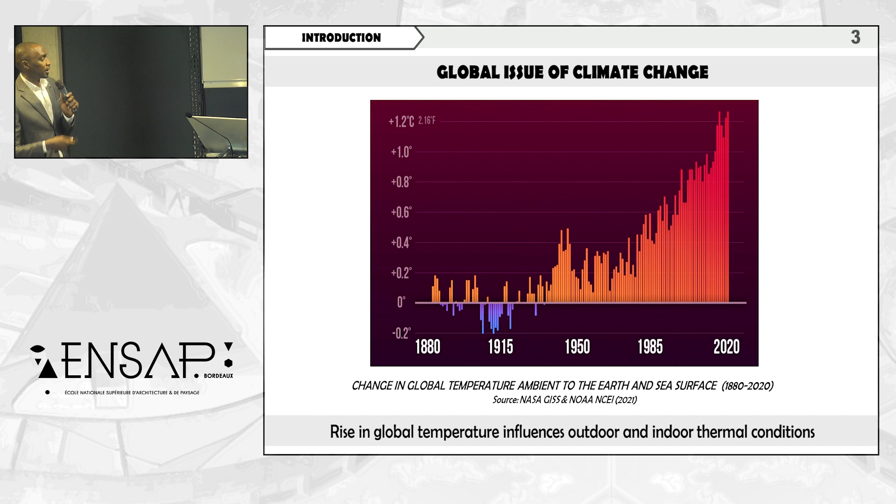However, this global warming has caused an increase in temperatures in the outdoor conditions, and these outdoor conditions have also led to an increase in the indoor thermal conditions. However, it is occupants that occupy these indoor places, and therefore these occupants are experiencing some kind of change in the thermal conditions in their indoor spaces. And these occupants are actually developing resilience, a way to adjust themselves or to adjust some other things to be able to live more comfortably in their indoor environment.

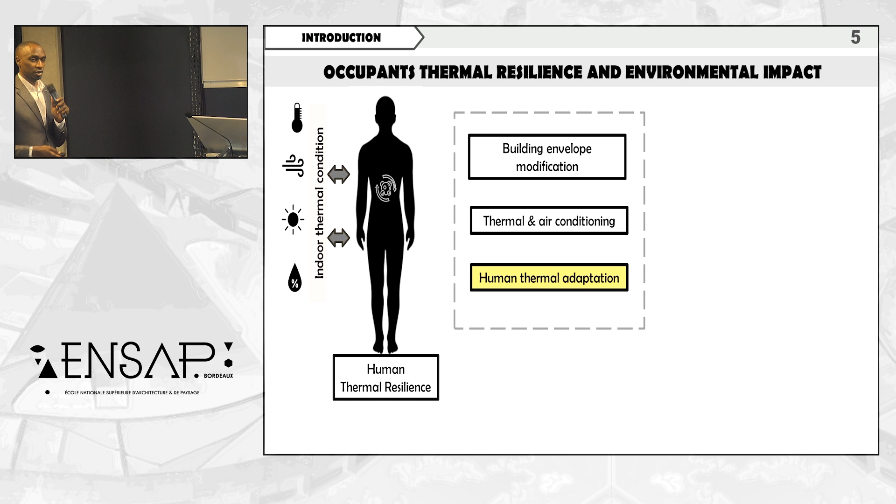Now, there are a few methods which occupants have used to develop their resilience, and this method could be mitigation method, or it could be adaptive method. Now, some of the mitigation methods are retrofitting building envelopes, modifying the building envelope to adjust the thermal condition within the space. Also, we have the air conditioning systems as some of the mitigation methods, and then we have the thermal adaptation of the occupant, of the individual within the buildings.

Now, this could result in the level of energy that is being consumed. It can also result in the cost of occupancy, the cost of energy. It also affects the environment, and it also has implications on the health and the well-being of the occupant. However, based on my research objective, I'll be focusing more on the human thermal adaptation.

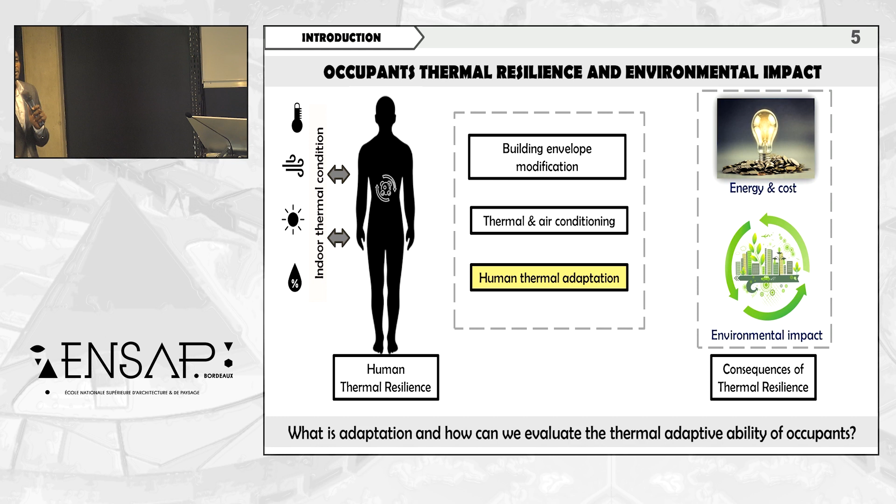Now, to talk about the human thermal adaptation, it is quite important for me to also make some emphasis on thermal comfort, because thermal comfort is a condition of the mind that is satisfied with the thermal environment. And according to ASHRAE, it is assessed subjectively. There are other definitions of thermal comfort, and some of the definitions show that thermal comfort is like an intersection of physical stimuli and cognitive systems of the human body.

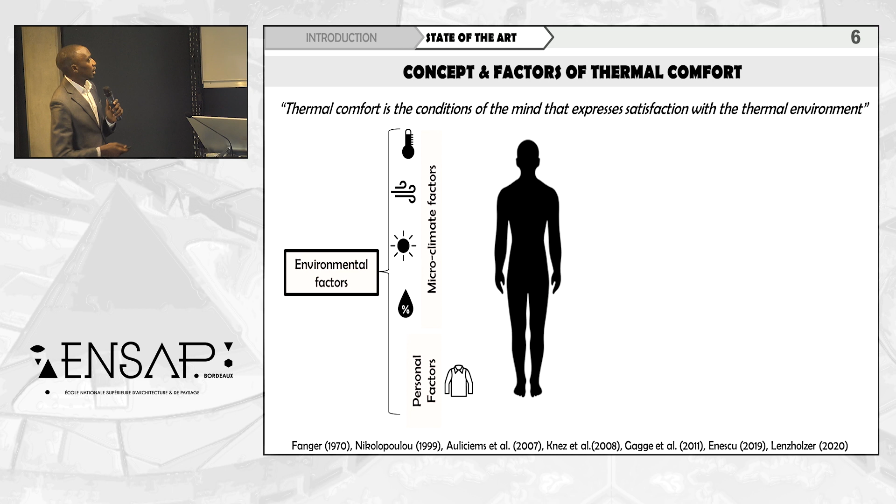However, there are various factors that affect this thermal comfort, and they can be grouped into the environmental factors, which include the microclimate factors, such as the air temperature, the humidity, the air velocity, the radiant temperatures, and the clothing. And then the other factor is the physiological factors, which have to do with the human thermoregulatory system. And this system has a lot to do with convection between the body and the environment, the radiation, the sweating, diffusion from the skin surfaces, and respiratory systems of the body.

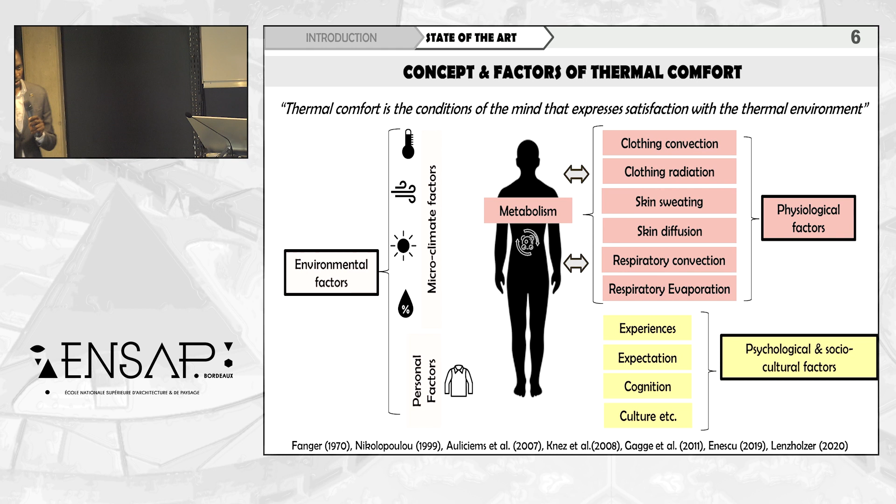We also have the psychological factors, such as the experiences the occupant has, the expectations they have, the cognitions, the habituations, their perceived control, and much more. And then we have sociocultural factors, which involve cultures. It involves also the technological advancement, the standard of living, the religion in a particular place. All this affects thermal comfort.

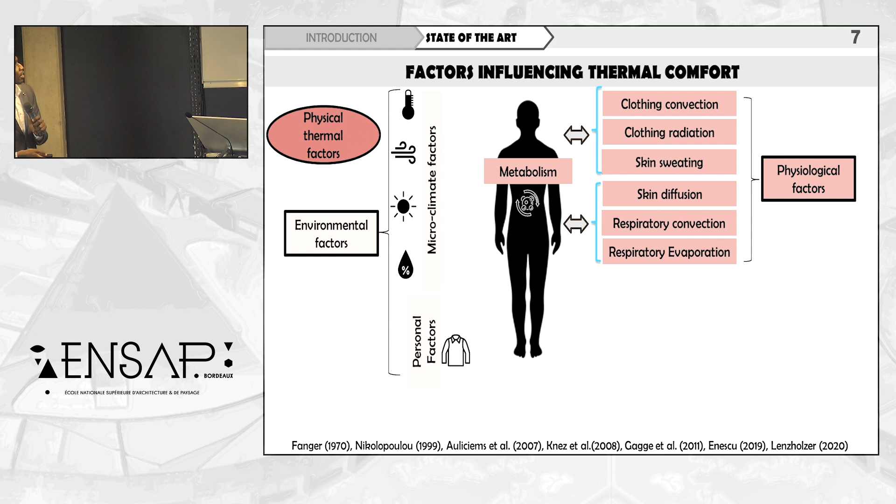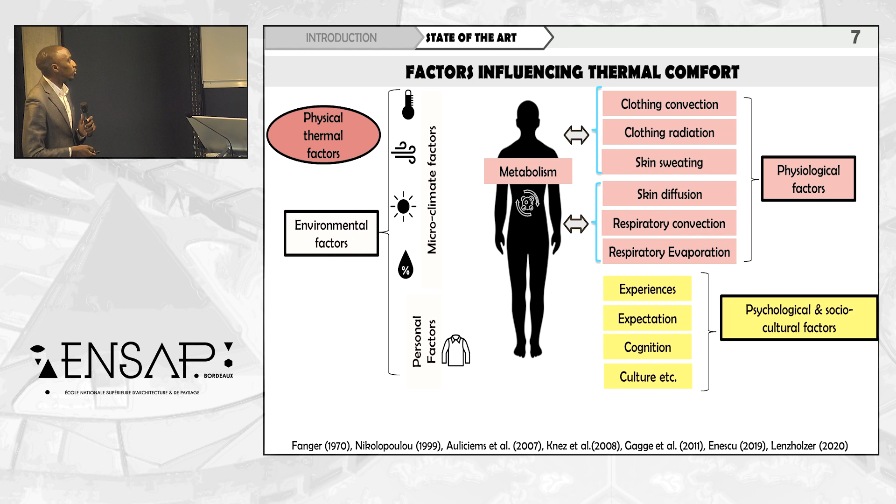However, we can group these factors into two main branches. Now we can group the environmental factors and the physiological factors as physical thermal factors, of course, because they are objective in nature and they cannot be influenced by human opinion. Also, we can group the second part into adaptive factors, which involve the psychological factors and the sociocultural factors.

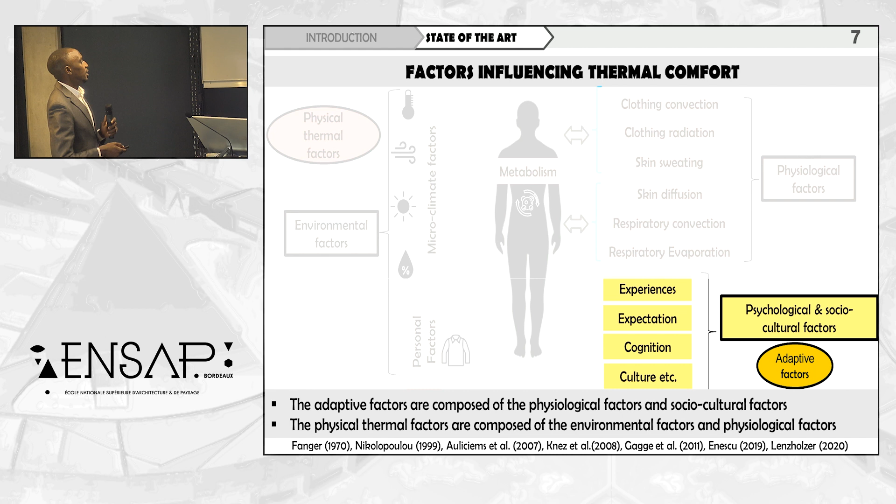Therefore, thermal perception of a person or of an occupant is influenced by the physical and adaptive factors. In other words, physical thermal evaluation and adaptive factors react together or combine in such a way to give us the final human perception. Now, I would also like to take you through the color codes I use in my presentation. As you can see, the red colors mostly refer to the physical thermal evaluations or factors. The yellow colors refer to most of the adaptive factors and evaluations.

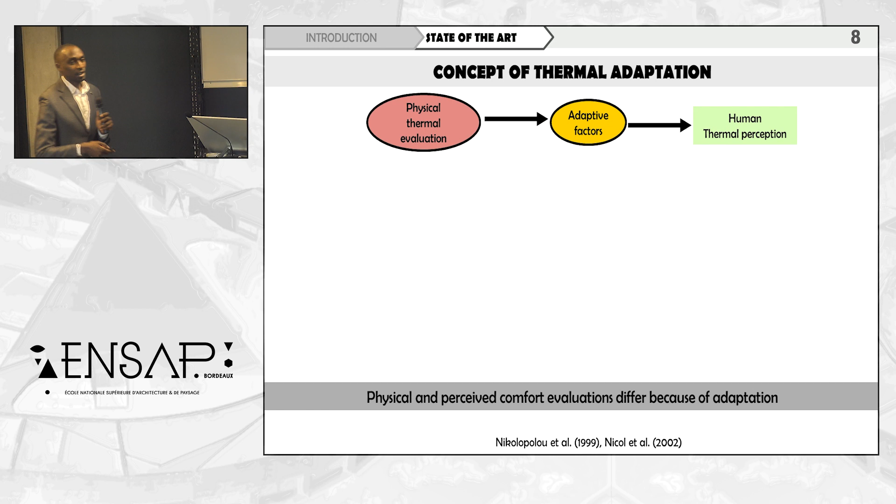And then the green color refers to most of the thermal perceptions and evaluations of perceptions. Now, I would love to define adaptation. Adaptation is a reduction or the diminution in the response of an occupant in order to tend towards thermal comfort, in order to feel more comfortable.

Now, to go forward, we can see that three factors are responsible: the physical thermal evaluation, the adaptive factors, and the human thermal perception. First of all, we want to see what other work has been done on the physical thermal evaluation. Now, the physical thermal evaluation is based on the heat balance principles. And the heat balance principle is based on the fact that the heat produced must be equal to the heat loss.

So therefore, the heat produced by the body metabolism should be equal to the heat loss by the body through convection, through radiation from the surface of the skin, through skin sweating, through diffusion from the skin surface, through respiratory convection, and through respiratory evaporation. Now, a balance between these creates thermal comfort. However, if there's a difference between them, then there's some level of discomfort based on the physiological realm or physiological evaluation.

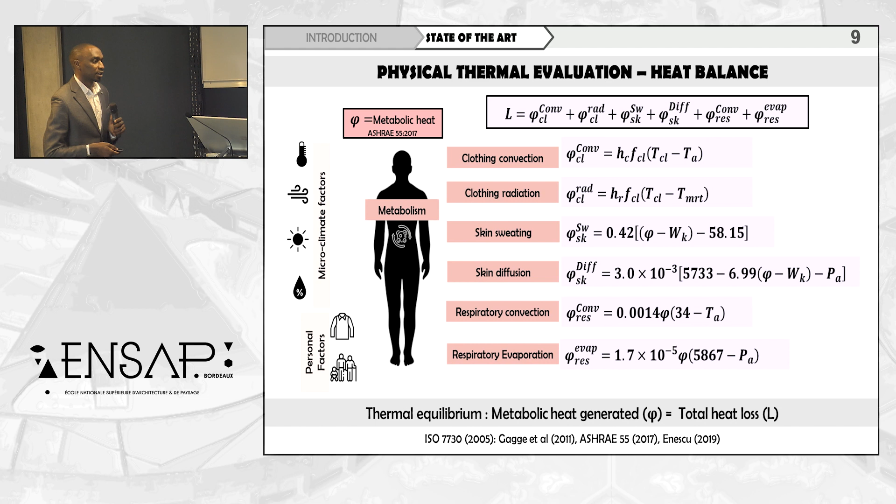Now, a researcher called Fanger was able to process this heat balance model or heat balance principle into thermal sensation votes. And these thermal sensation votes range from -3 to +3, showing the level of sensation of the subjects or of the occupant. Now, he performed some experiments in the Technical University of Denmark, where he placed some subjects in the climate chambers, and then he modified the thermal conditions within there, and then he took their thermal sensation vote.

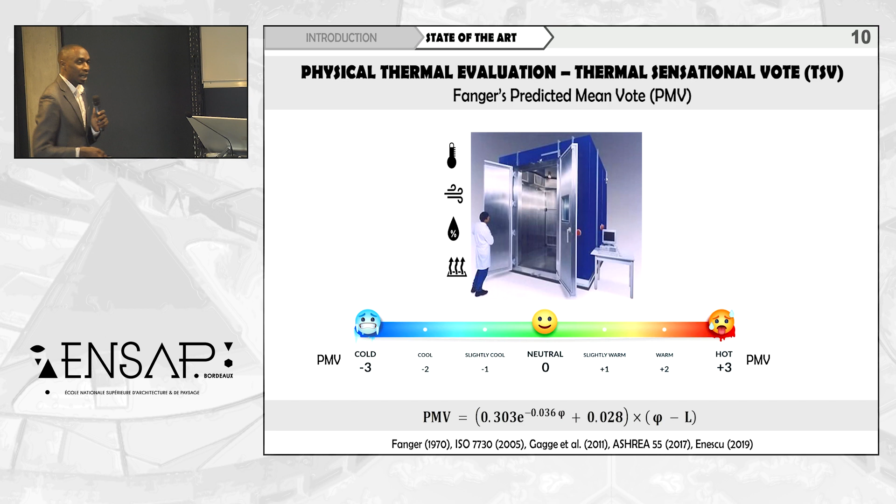He observed that this sensation vote has a relation with the heat loss from the subject's body. And therefore, he created a model called PMV, that's the predicted mean vote, which is a function of the difference between the heat produced and the heat loss from the body. This was a very good start or a very good model. However, there were a few limitations to this model.

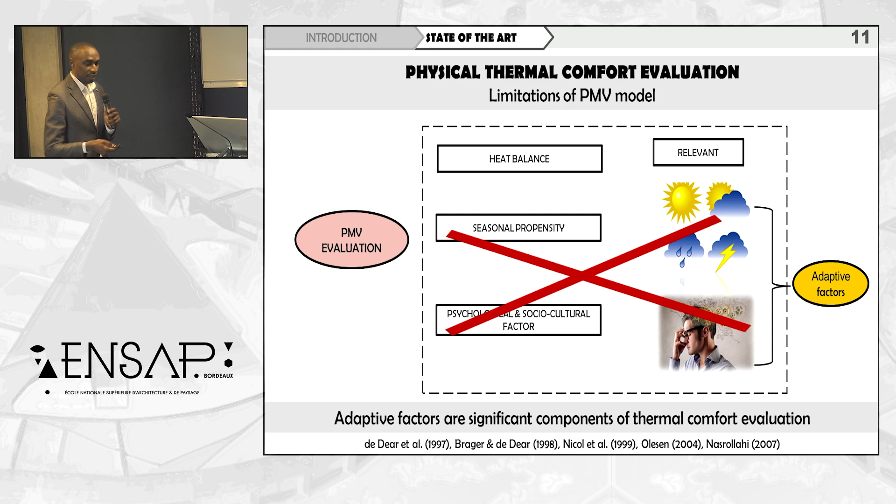Now, of course, this model functioned well with the heat balance. He tried to relate the heat balance to thermal sensation votes. However, this model didn't consider seasonal propensity, changes from like summer to winter. Of course, there are times when you have the same thermal condition or the same temperature in different seasons, and then you feel differently. Now, this model also didn't consider a lot of psychological factors, like we mentioned before, like experience, like habituation.

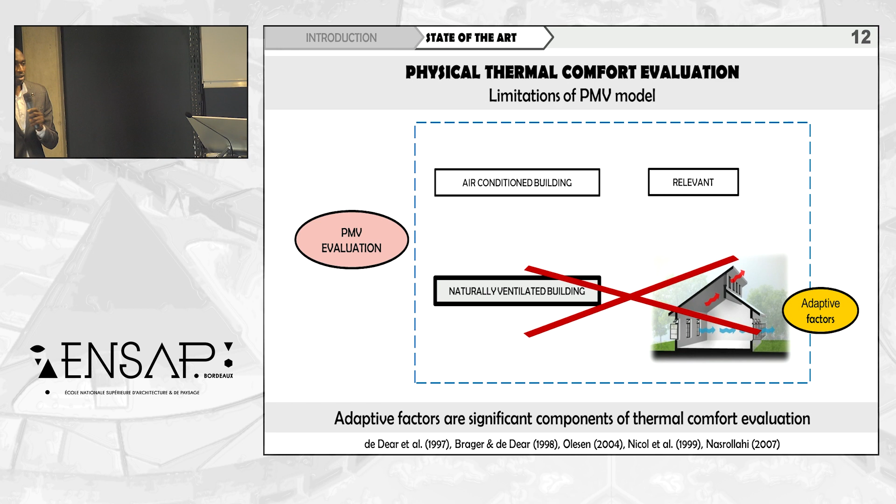Also, this model was relevant for air-conditioned buildings because the climate chambers were air conditioned, but there was some discrepancy found by field researchers, who explained that it overestimated the hot temperature and underestimated the cold thermal conditions. And these factors that were not taken into cognizance were actually the adaptive factors. However, to improve on these models, some field researchers proposed that there should be an adaptive model.

One of these researchers is Yao. And Yao proposed a model called the adaptive predicted mean vote. Now, Yao conducted some experiments in Chongqing University in China, where students were the subjects, in the classes, and he was able to take the thermal sensation vote of these students and also measure the air parameters of the classes.

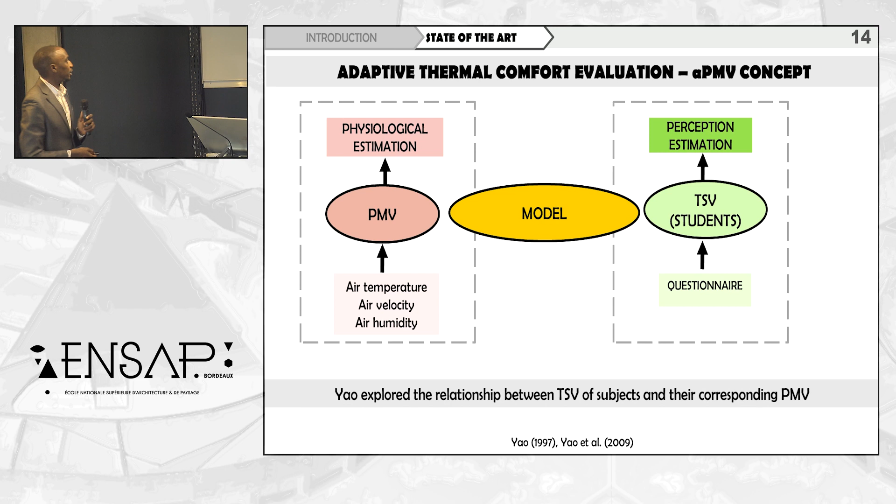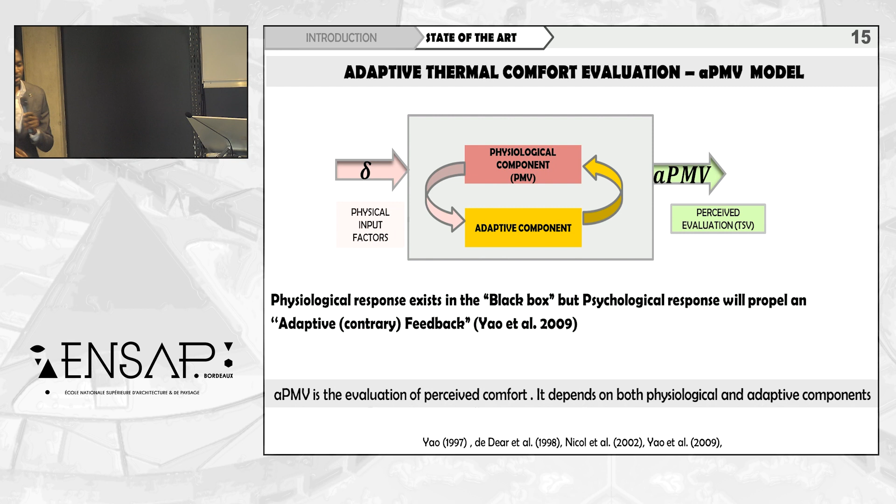Now, also, Yao made some postulations, and this postulation implies that within the black box, there is a physiological component and an adaptive component. And this physiological component and adaptive component act contrary to each other. And with that, he was able to create some mathematical expressions and some equations.

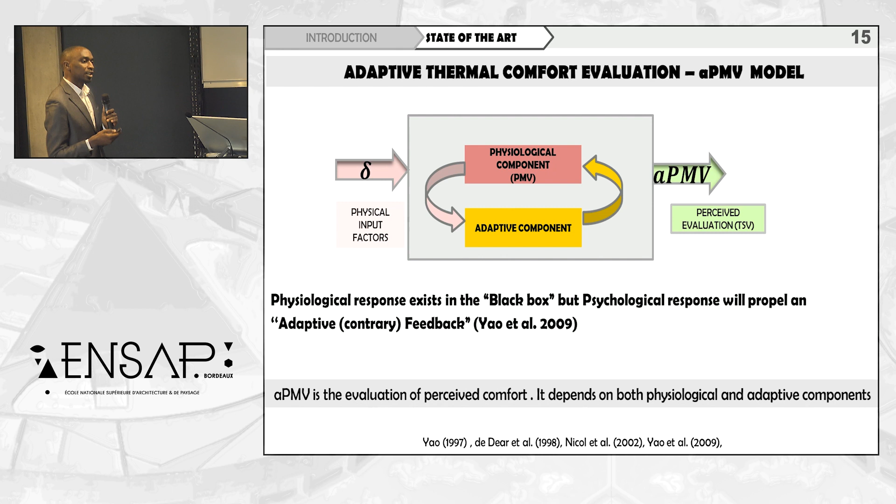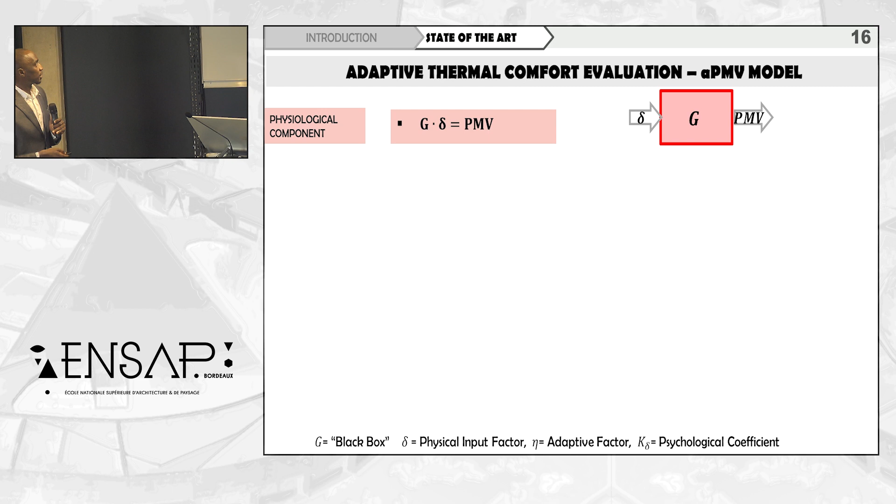Now, for the mathematical expression, Yao proposed that the physiological component is a function of G, which is the black box, and delta, which is the stimuli. And then the result of that is the PMV, which is physiological. Now, the adaptive factor is a function of the black box and the psychological coefficient, K delta. And also, there is a feedback within the APMV and this.

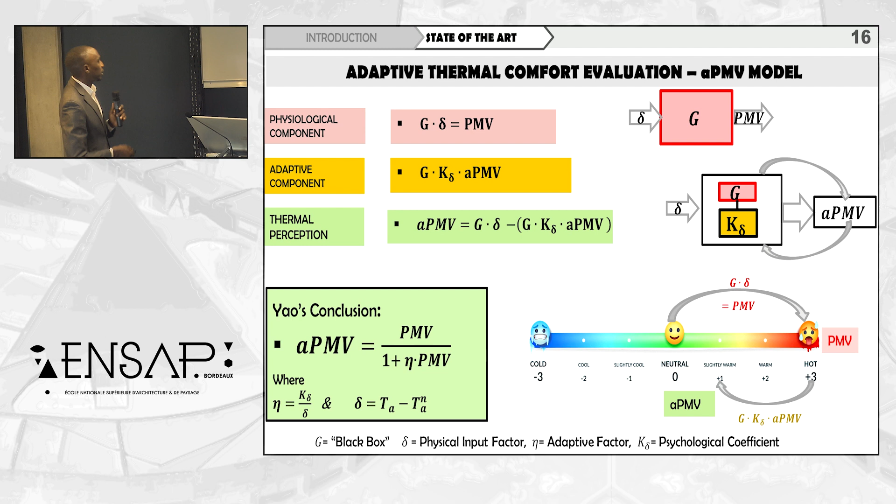Now, he also concluded that the thermal perception will be the difference between the physiological component and the adaptive component, as we can see on the screen. And at the end of the day, he came up with an equation that APMV is a function of PMV and eta, being the adaptive factor. And this adaptive factor, he proposed, was a function of the psychological coefficient K delta and the

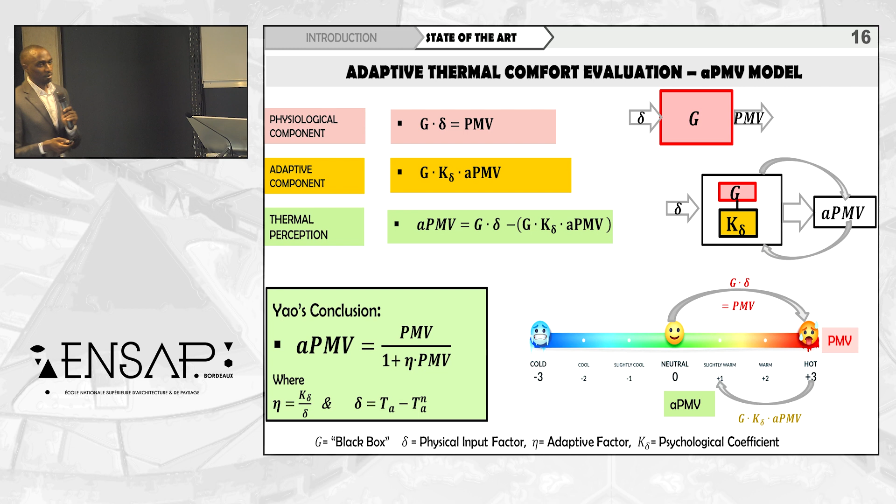stimuli delta. He also proposed that delta, the stimuli, is a function of the difference between the air temperature and the neutral air temperature. Now, the neutral air temperature is the air temperature where the subject actually feels neutral. That means it doesn't feel hot or cold. And with that, it was actually quite a very good model.

However, there were a few limitations I was able to note, that most of the measurements and parameters of Yao were actually air-related parameters. That means the air temperature, air velocity, air humidity. And therefore, the radiant parameters were actually being estimated. And that could affect, to some extent, the accuracy of the model.

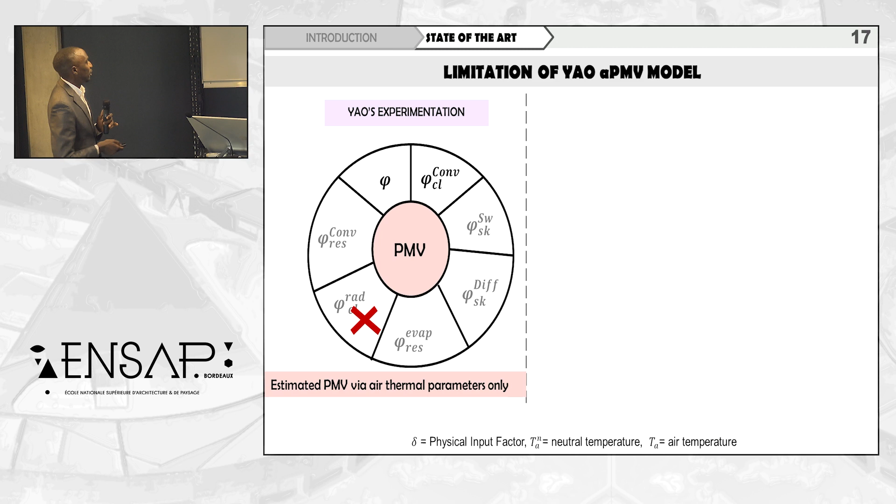Secondly, Yao chose to use the air parameters as the parameters for determining the stimuli. However, these stimuli are affected by parameters other than the air parameters, such as the radiant temperatures, the relative humidity, the air velocity. And this was not actually considered in determining the stimuli.

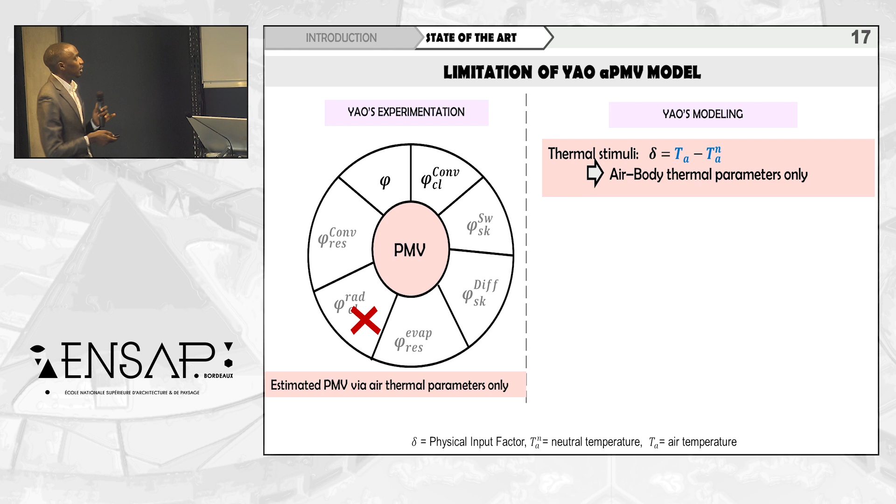Thirdly, from the equations of Yao, we're able to deduce that if PMV is 0, then it automatically means that APMV will be 0. That means the actual perception of the person will be 0. However, due to adaptation, when PMV is actually +1, a person could tell you that he feels neutral. And also for the cold sensation, a person could tell you he feels neutral, even when the evaluation of PMV gives you slightly cold.

Now, having done some of this background study on these thermal comfort evaluations, I was able to come up with some research questions inclined to my research objective. One of the questions is how can I improve the APMV model? The next one was how do I do a comprehensive PMV evaluation such that I can take into account more parameters that actually affect the stimuli of an occupant.

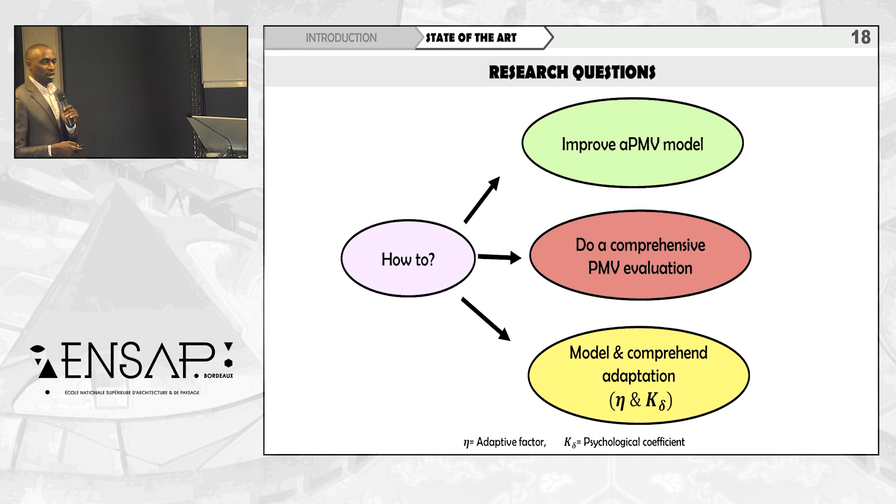And thirdly, how could I model, or have a clearer understanding of, what adaptation is. And that will be how do I model the adaptive factors in the equations, and also the psychological coefficient in the equations. Now, to start with the first one, which is to improve the APMV model.

Like we said in the previous slide, he used the air temperature to determine the stimuli of the occupant. In my case, I chose to use the operative temperature. Why? Because the operative temperature considers the air temperature, the mean radiant temperature, and the air velocity. And with this, we have more factors which are relevant to the stimuli.

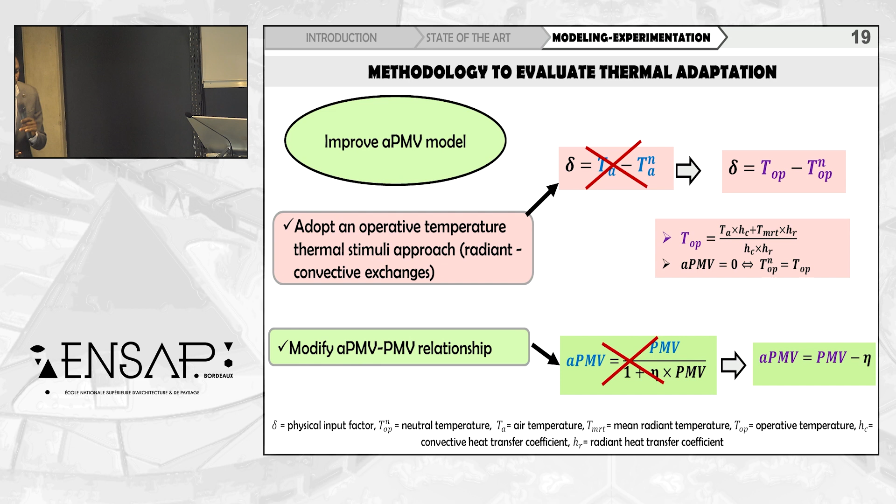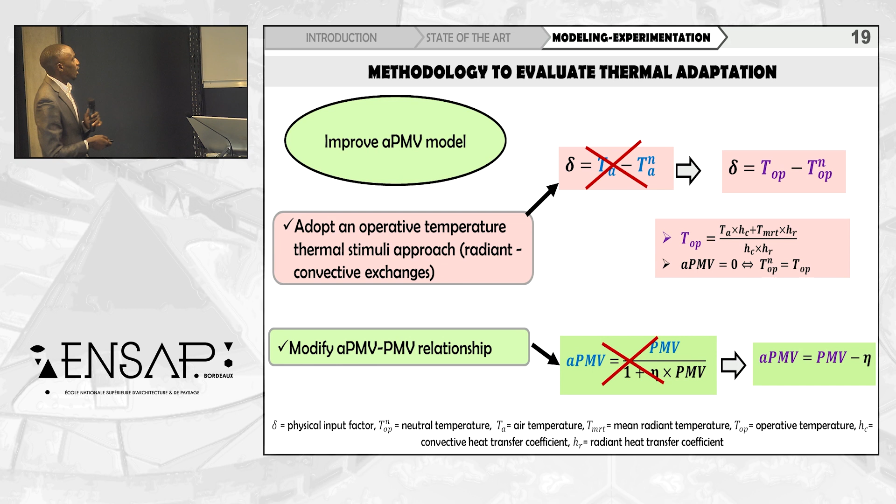Secondly, we decided to modify the APMV-PMV relationship of the model to curb the anomaly which we experienced. It was based on the simple principle, as you can see, that APMV is a function of PMV and eta, and that the physical thermal evaluation, being PMV, reacts contrary to the adaptive factor.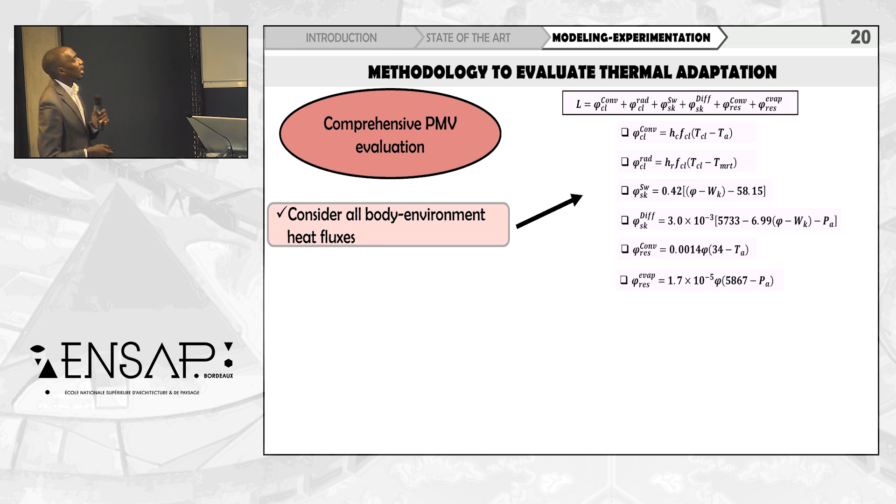Now, having done this, the next is to have a comprehensive evaluation of the PMV. In this case, I decided to consider all the factors possible: convection from clothing, radiation from clothing, sweating from the skin, diffusion from the skin, convection by the respiratory system, and also evaporation or latent heat released by the respiratory system of the human body.

Secondly, I decided to also consider the various seasons which we experience, such as summer, winter, and autumn. I termed them the cold, the cool, and the hot thermal conditions which the occupant experiences, and tried to consider them separately. Now, thirdly is to model the adaptation of the occupants or subjects.

Now, to model it, I started with my proposed equation, which is equation 1, as we can see on the screen. The second equation was to determine the PMV, which is the Fanger equation. And the third equation is to determine the heat loss, which is actually substituted in the Fanger equation, that's in the PMV equations. And then the fourth equation is the equation proposed by Yao, which is a function of the adaptive factor.

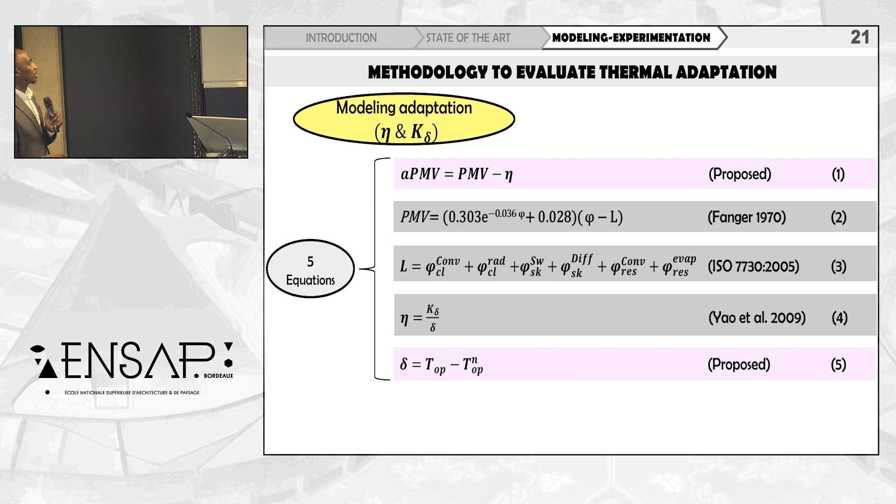And then the fifth equation is the equation I proposed based on the operative temperature parameters to determine the stimuli of the occupants or of subjects. Now, in this case, we have 5 equations, but we have 6 unknown variables. Therefore, to actually have a closure of these equations, it is important to determine the 6th equation, which is the equation of the psychological coefficient K.

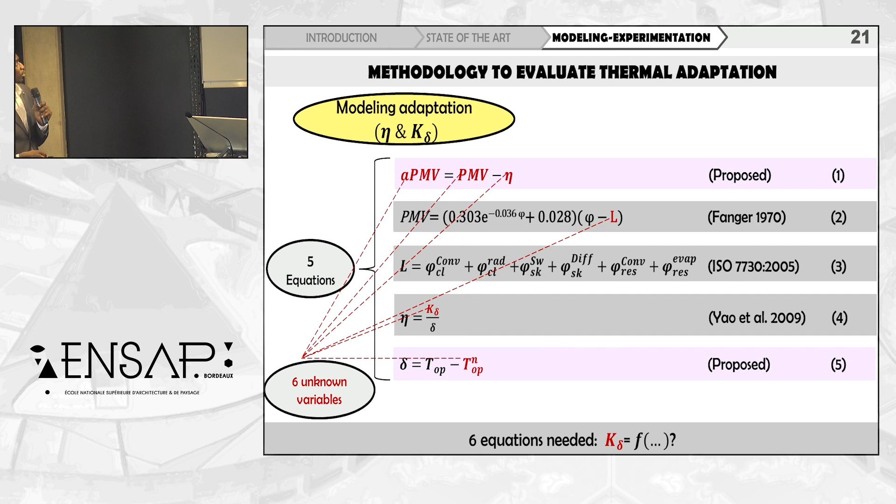To do this, I came up with some operations of how to go about this. Now, the modeling and experimental protocol or operation is starting with the experimentation, the experimentation protocol. And this experiment is to experiment, in an enclosure, with some subjects, and to be able to determine their sensations and their perceptions and their thinking, at the same time measuring the physical parameters that will be involved in it.

Now, with this, I'll be able to evaluate the heat loss L, and when I evaluate the heat loss L, I was able to evaluate the PMV. And then with the questionnaire, I'll be able to get the thermal sensation vote of the subject, and then to be able to evaluate the APMV. And then we can see, based on this first equation, that we'll be able to evaluate the values of the eta, which is the adaptive factor.

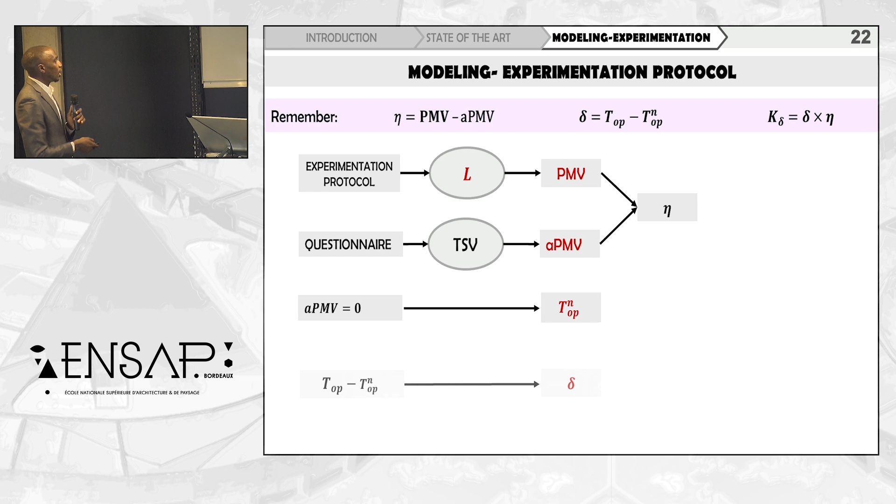Next was for me to evaluate the neutral temperature. Now, this neutral temperature is the temperature when the subject feels neutral, and this point is when the APMV is 0. With that neutral temperature, I can now evaluate the thermal stimuli of the subject. And then finally, I'll be able to evaluate the psychological coefficient of the subject. So this is the flow of the operations which I wish to follow.

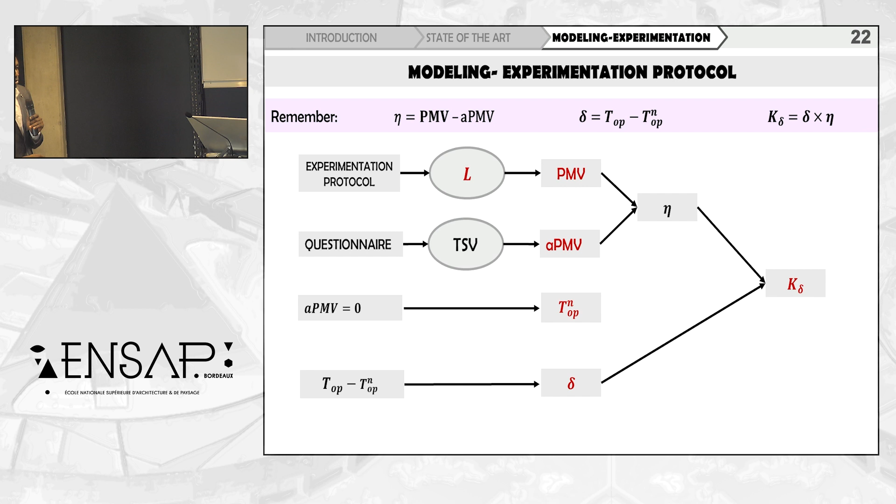Now, to start with the experimentation. The experiments were conducted in 2 basic places. One was in the experimental cell, which we constructed, and the other was in the naturally ventilated room, or laterally ventilated room. As we can see on the screen, we have this as the constructed one. We constructed it with steel surfaces, and then we were able to heat and cool from this side of the room. The idea was to have a set of plates that can mimic the office, and then the wall is to mimic a wall that is receiving a solar gain from the outdoor environment.

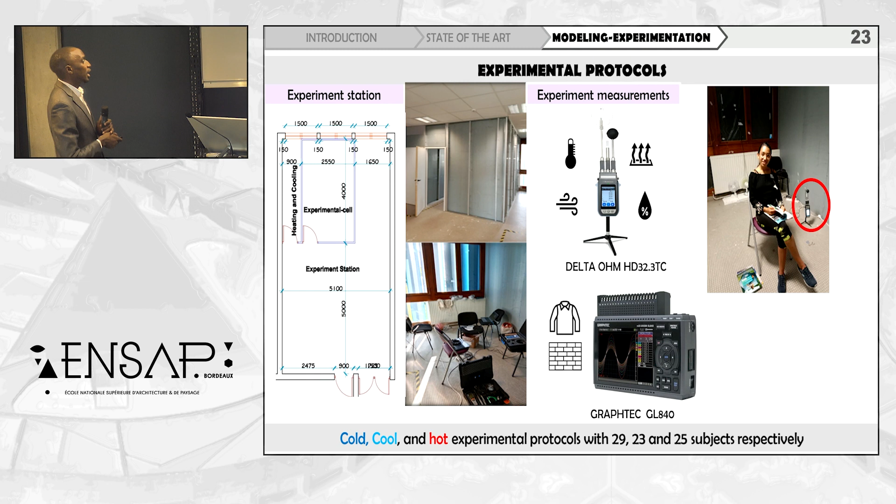Also, this experiment was grouped into 3 major formats, which was the cold experiment, the cool experiment, and the hot experiment. As we can see, we also have some measuring instruments which we used, the Delta Ohm instrument and the Graphtec instrument. The Delta Ohm instrument was used to measure the microclimate, such as the air temperature, the air velocity, the humidity within the room, and the Graphtec instrument was used to measure the temperature of the surface of the walls, and then the temperatures of the clothing.

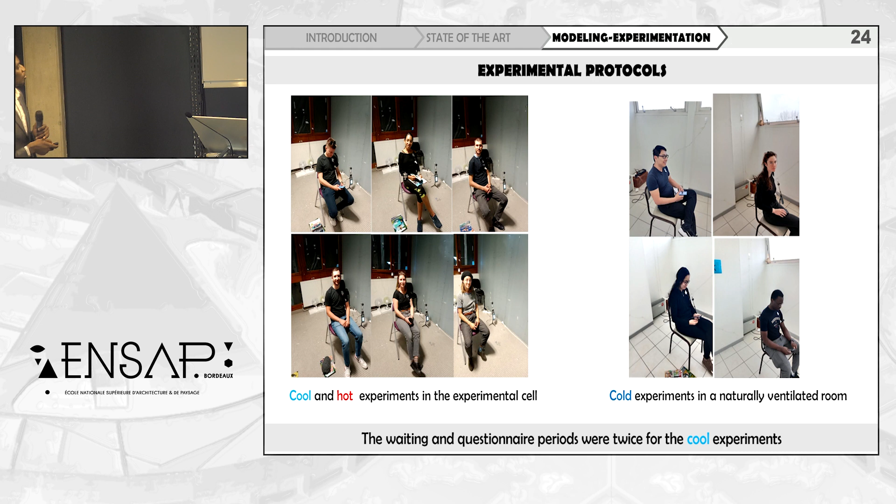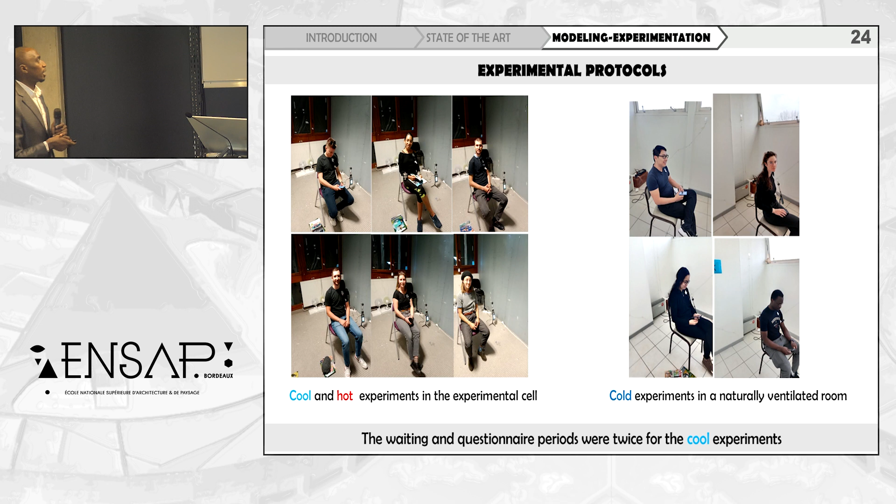Now, we can see on the screen some of the subjects in this experiment. The cool and the hot experiment were carried out in the experimental cell, while the cold experiment was carried out in the naturally ventilated room. Now, there were various scenarios in this experiment. There was a specific trend of scenario which was the same for all the experiments. It starts with the pre-experimental period, where we take the general information of the person, the age, the sex, his country, etc.

Now, after that period, the subject goes into the room, and he is to wait there for about 10 minutes to be able to acclimatize to the environment in the cell. After which, he will begin to fill the questionnaire. And after he fills the questionnaire, he will come out of the experimental room, and we offered them a short interview, just to be able to confirm that what is written in the questionnaire is actually what they felt.

Now, the questionnaire was designed to find out some factors or some behaviors from the subjects. These behaviors include the thermal perceptions of the subject, the preferred perceptions, some of the past experiences of the subjects, which factors they deem important among the factors that are influencing them, and finally to check if they have some level of tolerance based on the thermal conditions.

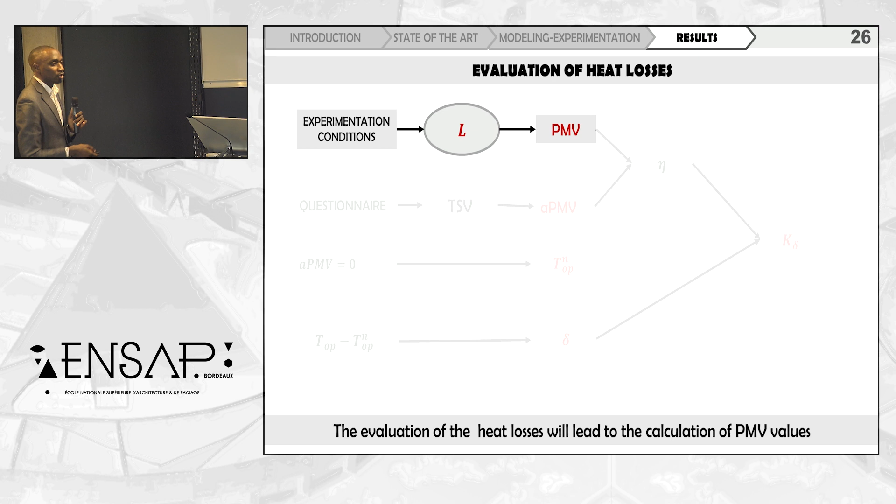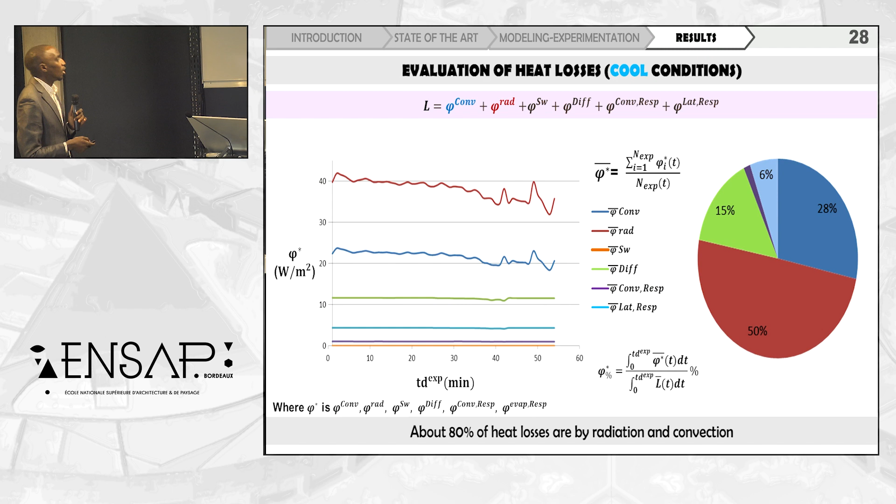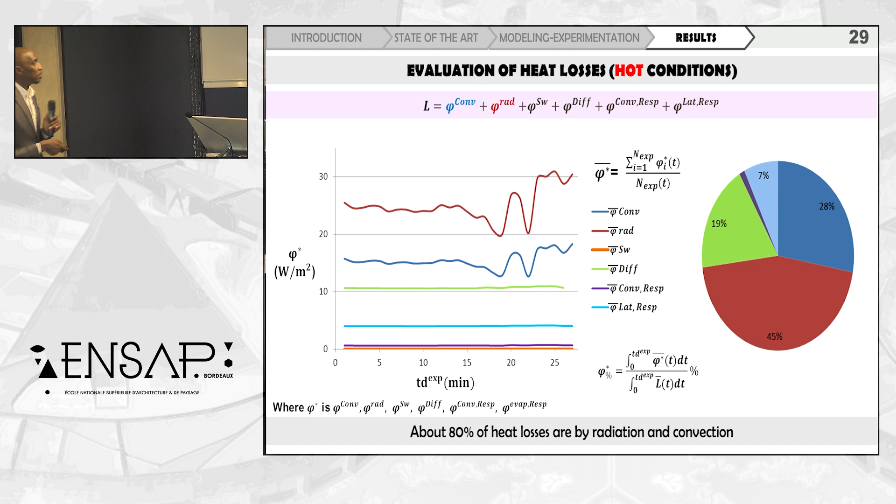And according to the heat balance principle, the rate of heat loss determines the level of sensation. That means these two factors will actually give a high level of sensation within the sensation of the subject. Now, this was done for the cold condition, and in the cool condition, we have similar result of about 80% heat loss by radiation and also by convection. In the hot thermal condition, we also had similar result of about 80% heat loss by radiation and convection.

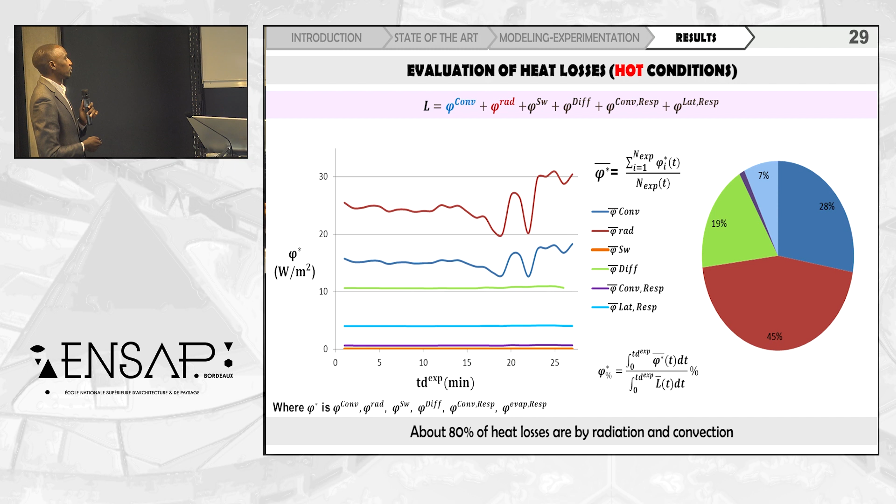However, in this case, we have more heat loss by evaporation, as you can see there was a heat loss by diffusion over there. It was actually higher than the other two slides. Now, with this, we were able to come to a good conclusion that the operative temperature will be a very significant parameter in the evaluation of thermal stimulus. Why? Because the operative temperature has similar parameters with the convective heat loss and also with the radiant heat loss from the body.

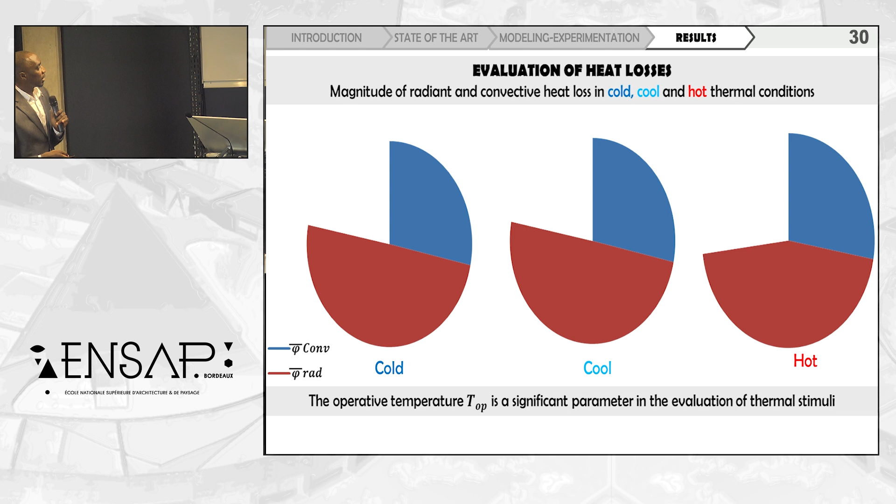Now, having come to this point, we were able to calculate the PMV values of the experiment. And with that, we decided to go forward in the process, which I had earmarked. The next was to actually evaluate the adaptive factor. And of course, we will have gotten the APMV through the thermal sensation vote of the students. Now, as we were able to see in the previous equation, the adaptive factor is the difference between the physical evaluation and the perception of the occupant or of the subject.

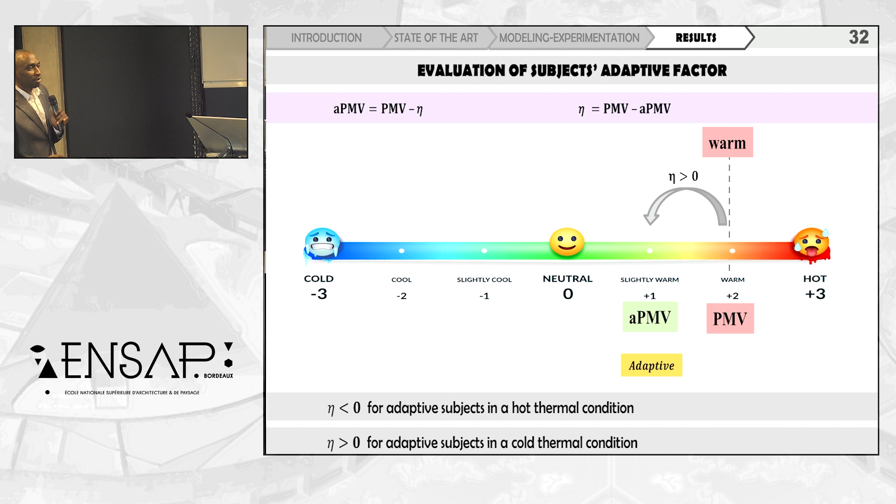Now, in evaluating this, we had two different kinds of subjects or two different kinds of experiment. The first is the adaptive experiment. And as you can see, on the warm, if the PMV is plus 2, and the subject had adaptation, he might give something like plus 1, slightly warm. Now, in this case, the adaptive factor will be greater than 0 for this adaptive subject in the hot thermal condition. And the adaptive factor will be less than 0 for the contra-adaptive subject in this experiment.

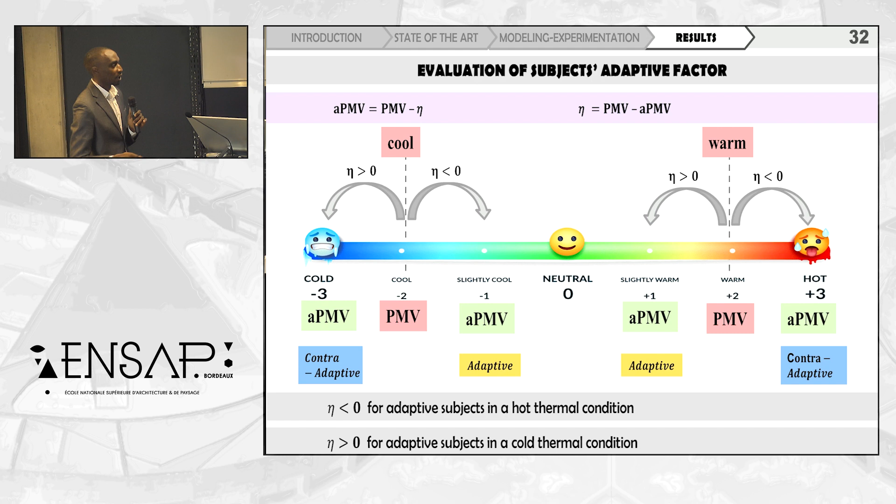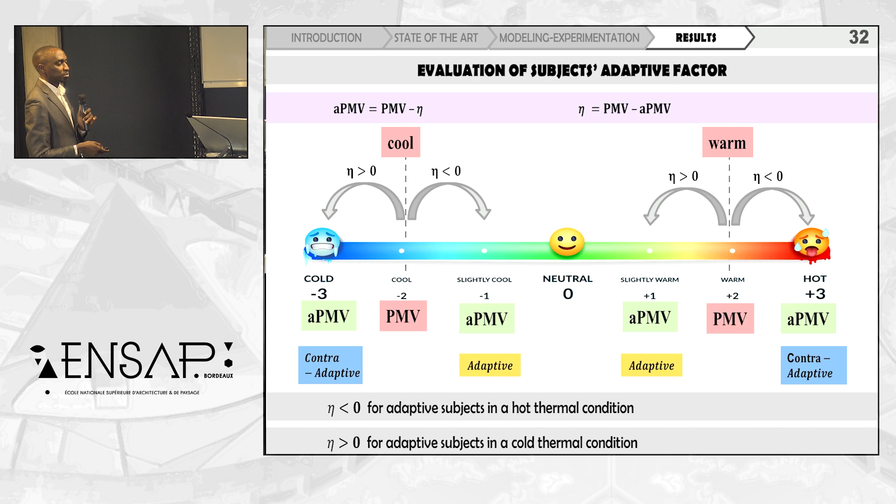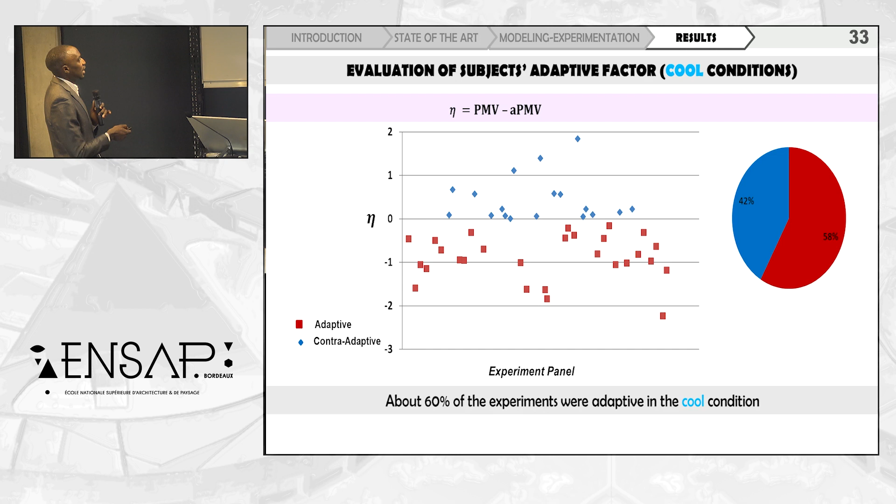The same thing is applicable for the cool, where the adaptive factor will be less than 0 for the adaptive subject, and greater than 0 for the contra-adaptive subject. Now, in this research, since I'm dealing with the adaptive factor of occupants, the relevant data were that of the adaptive subjects for both cases. For the cool conditions, about 60% of the subjects were adaptive, the ones in red below the 0 line. For the cold subjects, about 90% were adaptive.

Now, this also helped us to conclude that adaptive factors are not like the physical factors that are the same all the time. It has a lot to do with the choice of the person, the capacity of the person, and the information which the person has. And we can see here that the colder it is, the more they release their adaptive capacity, because more of them felt cold and they have to adapt to that environment.

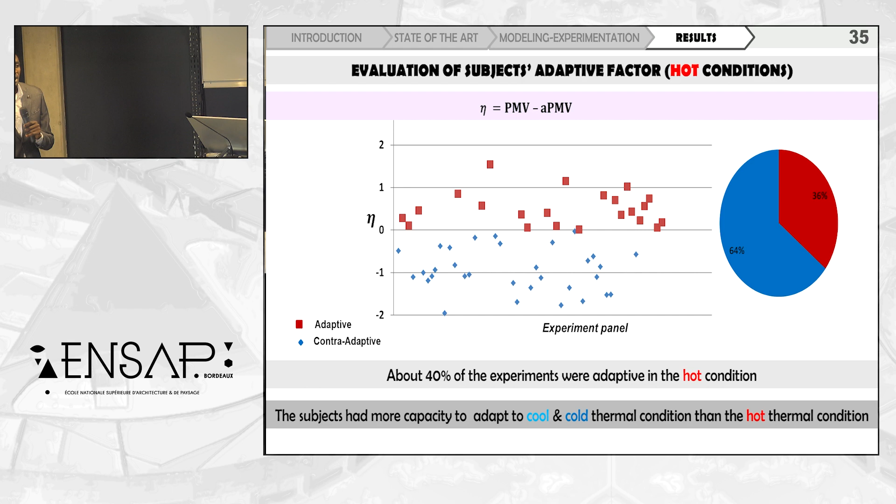Now, in the hot condition, about 40% of them were actually adaptive, and this helps us to conclude that the subjects in this region are more adaptive to the cold thermal conditions than to the hot thermal conditions. Now, having evaluated the adaptive factor, the next is to find a way to get to the psychological coefficient.

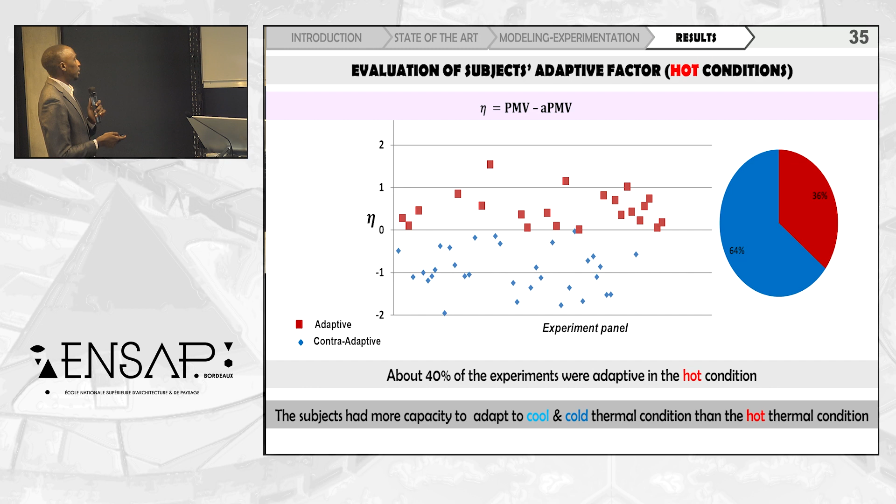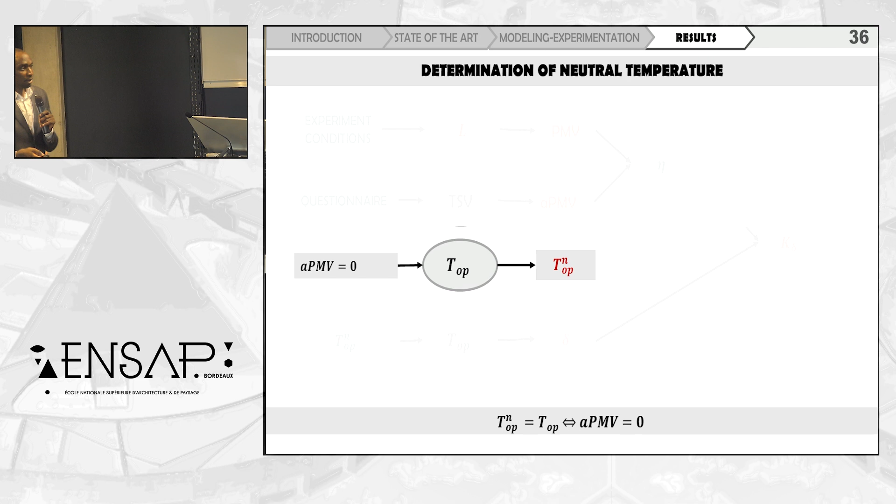Now, to determine the psychological coefficient, we need to first of all determine the neutral temperature, which is the operative temperature when the subjects feel neutral. In other words, that is the operative temperature when APMV is equal to 0. Now, to do this, we were able to find the average operative temperature of the subject when they voted 0.

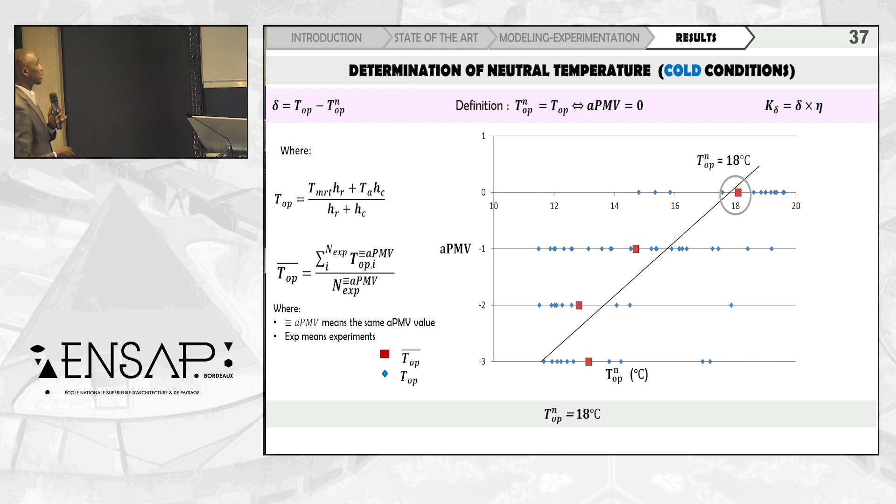We can see a plot of APMV against the operative temperature. And for that, we're able to have 18 degrees. However, we still plotted for the whole subject to see the average temperature on each thermal sensational vote. And then we got a regression to see if this regression was going to pass through the 0 point. And fortunately, the regression passed through closer to the 18 degree. So for the cold condition, we have the neutral temperature of 18 degree.

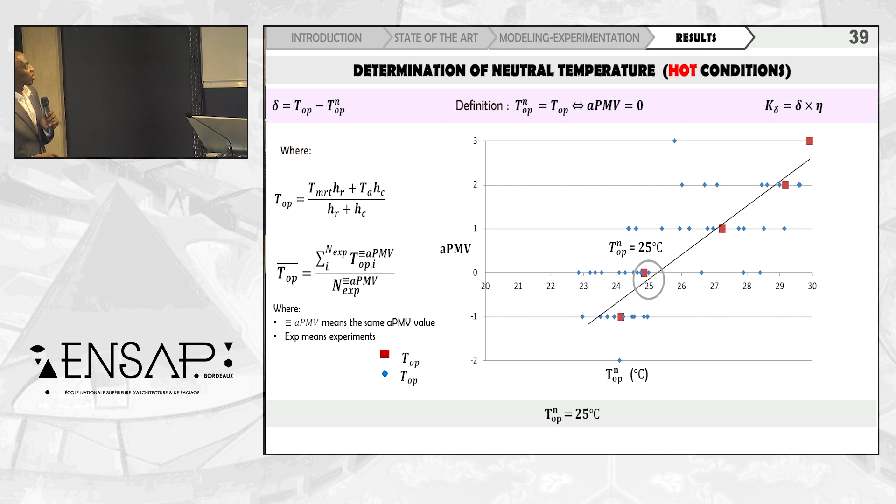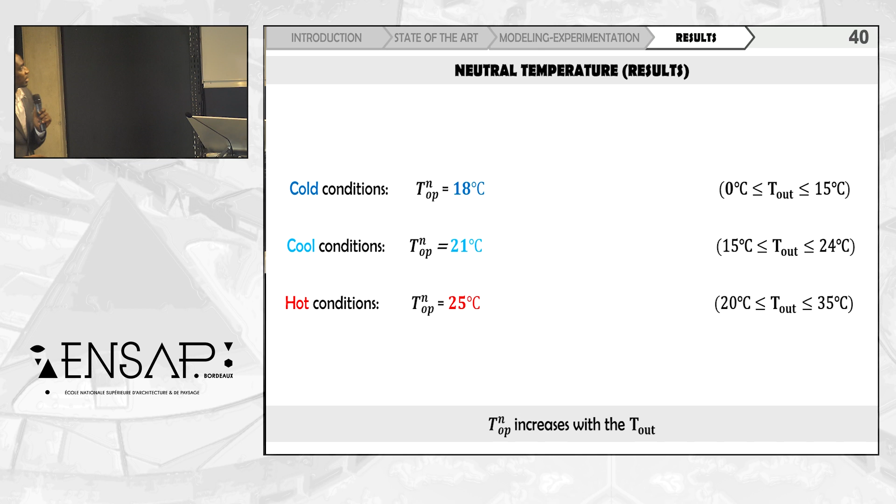Also, for the cool condition, we have a neutral temperature of 21 degree, following the same method and strategy of determining the neutral temperature. And then for the hot conditions, we have the neutral temperature of 25 degree for all the subjects that participated in the hot thermal condition experiment. Now, we were able to conclude that we have 3 neutral temperatures for 3 thermal conditions. And we were also able to observe that this temperature increases or decreases as the outdoor temperature increases and decreases.

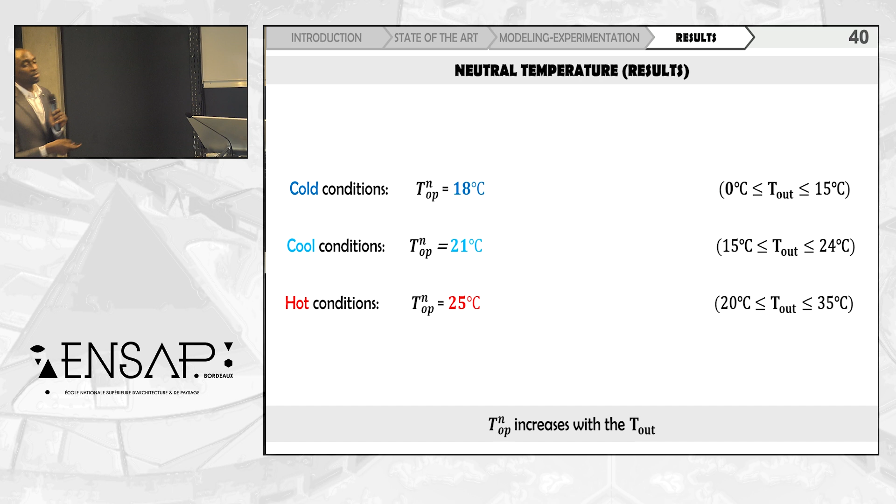Now, at this point, we'll be able to evaluate the neutral temperature. It means that we can go forward to evaluate the stimuli experienced by the subject. And with that, we were able to evaluate the delta, which is the physical stimuli. And then we're able to determine the psychological coefficient of the subject. Having come to this point, we decided to do some regression to find out what is the relationship between this psychological coefficient and other parameters that influence the adaptive capacity or the adaptive ability of occupants and the subjects.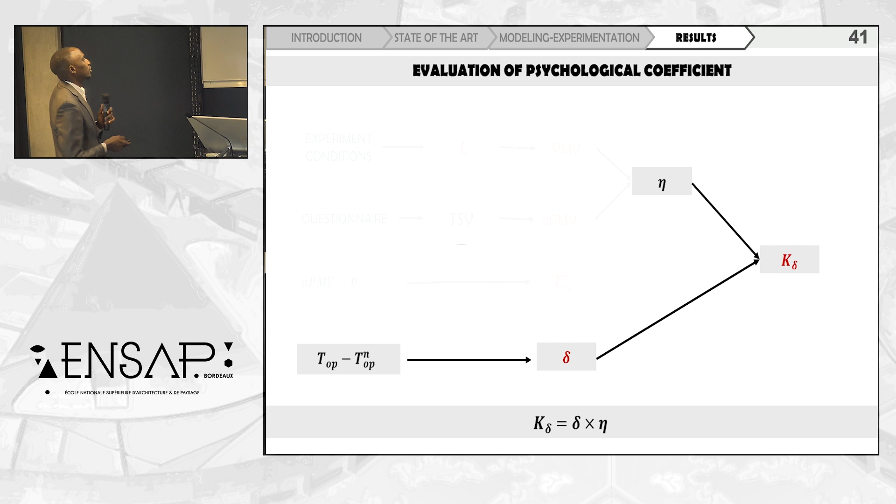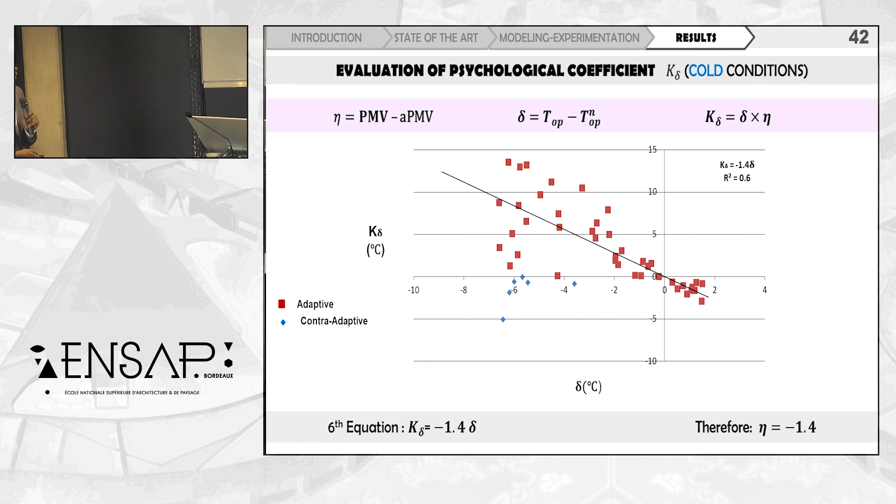Now, to do this, we plotted a regression of the psychological coefficient and the physical input factor or the stimuli. And then we were able to have a regression equation in which the psychological coefficient is a function of the stimuli, with a slope of minus 1.4. And based on this equation, we were able to conclude that the adaptive factor for the cold thermal condition was minus 1.4. For the cool condition, we did the same regression, and we were able to have a slope of minus 0.7, and with that, we concluded that the adaptive factor for a cool

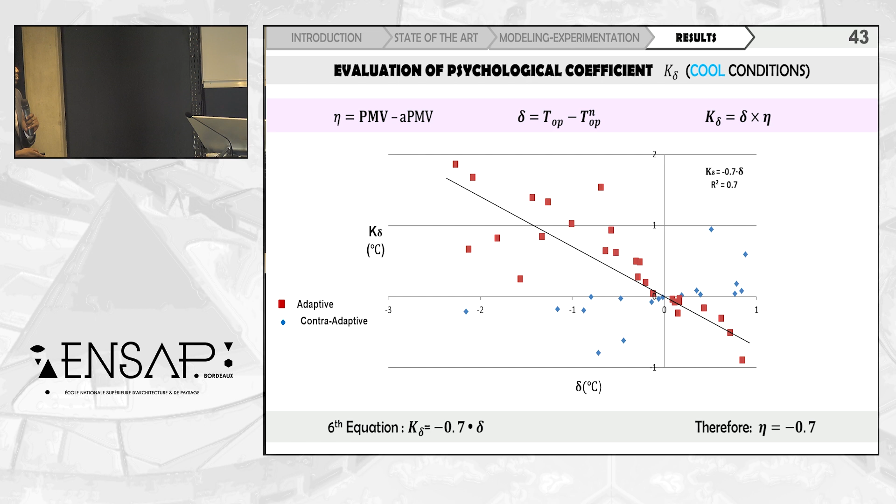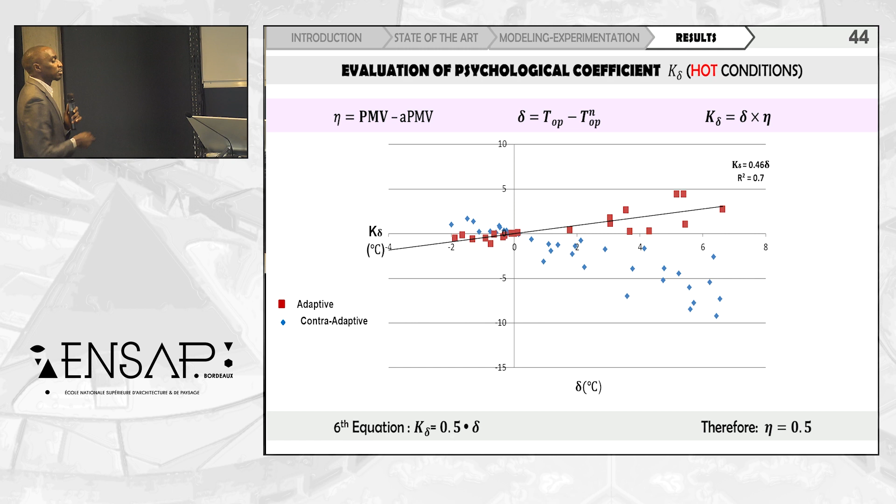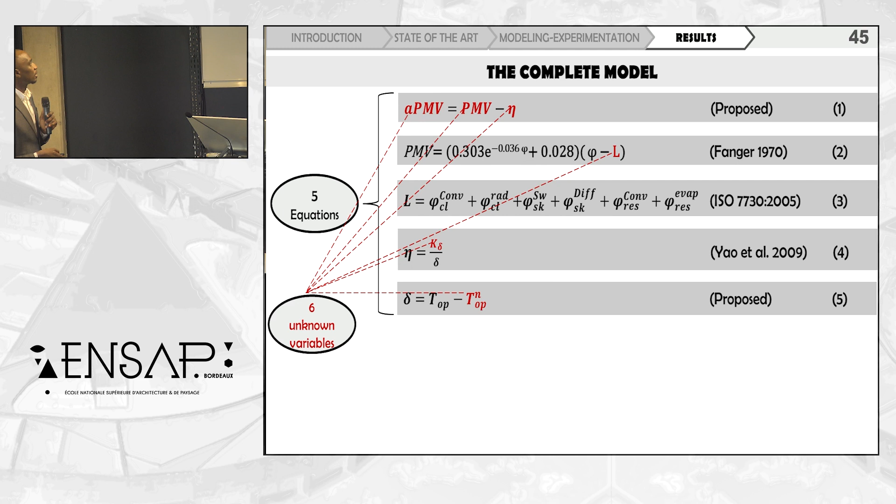condition was minus 0.7. And then, thirdly, we did the hot thermal conditions, and in the hot thermal condition, the adaptive factor was 0.5. Now, with this, we were able to have our complete equation, our closure equation, which is the sixth equation. And this sixth equation is the equation for the psychological coefficient, which is a function of the stimuli delta.

Now, having come to this point, based on this result, we had three adaptive factors for three different thermal conditions. I would love to also make us see that these adaptive factors are sensational quantities. And we thought of finding a way to transform these sensational quantities into some physical related quantities or parameters that influence them. Just like the way Fanger was able to transform the heat loss into thermal sensation votes, in our own case, we wanted to transform thermal sensation votes into physical thermal parameters.

And with that, we're able to see that the adaptive factor is a function of the psychological coefficient and the stimuli. And then we wanted to see if the psychological coefficient has a relationship with other physical parameters, such as the mean radiant temperature, the operative temperature, and other temperatures. Of course, we were able to stay with the operative temperature, which, as we have explained, takes into consideration more factors than other parameters.

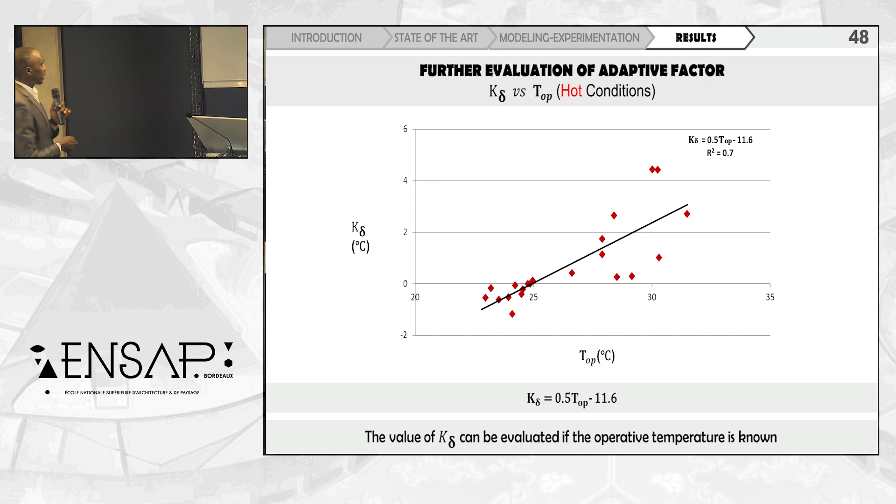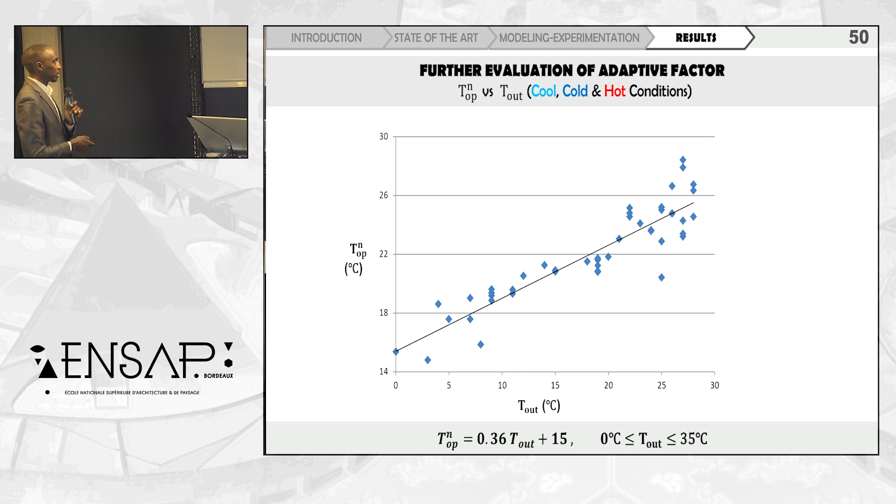Now, to go further, we went forward to determine the relationship between the neutral temperature and the outdoor temperature. As we can see, we have a regression here which shows that the neutral temperature is very related with the outdoor temperature with a slope of 0.36. And with this, we're able to substitute it to replace this neutral temperature here, and then we were able to have these equations for the three thermal conditions. With this, that means we'll be able to evaluate the adaptive factors when we have the values of the operative temperature and the outdoor temperatures.

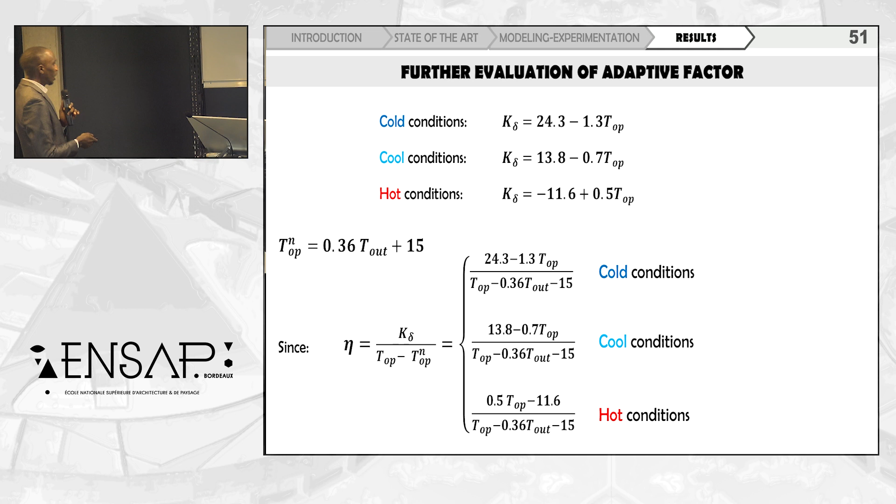Now, with this result, we'll be able to expand our results, our conclusions, our closure equations, of which now we have our sixth equation being psychological coefficient, being a function of the operative temperature, the outdoor temperature, and the stimuli of the occupant.

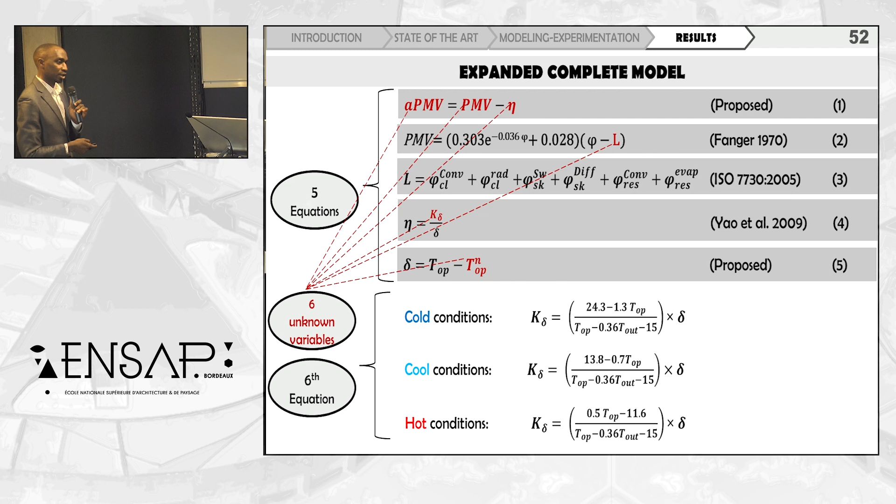Now, having come to this point, we want to drive to some of the conclusions which we were able to extract from these results. Now, the first conclusion is we did everything possible to have a comprehensive evaluation of the perception by trying to take into cognizance as many factors as possible that influence the thermal adaptation, from the physical to the psychological to the physiological factors. Also, we can conclude that the operative temperature is a very significant parameter in the evaluation of thermal adaptation of an occupant.

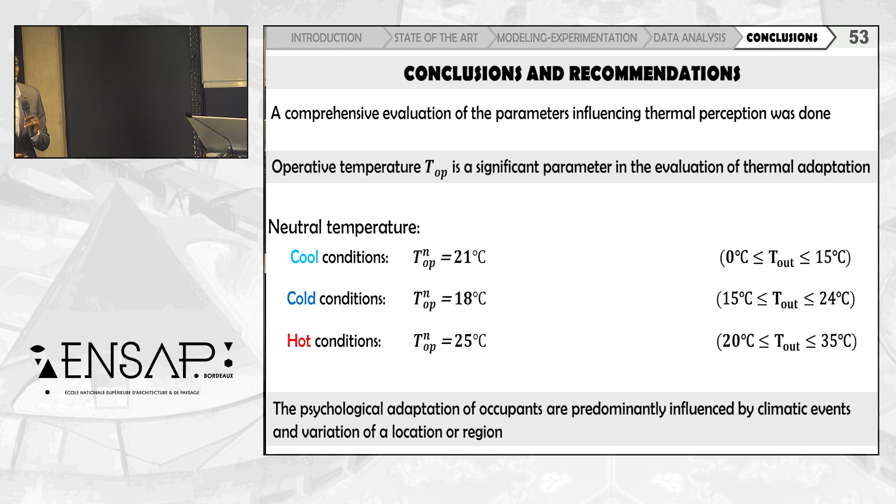Thirdly, we were able to have some specific neutral temperatures for some specific thermal conditions or seasons of the year, which for the cool was 21, for the cold was 18, and for the hot was 25. And then fourthly, we can also conclude that the psychological adaptation is also predominantly influenced by the climate seasons, the climate variations of the occupant. In other words, their psychological reasoning is very much attached to the climatic period of the year. Now, having been able to do this, we have a few limitations to the research as well as to the experiment and result.

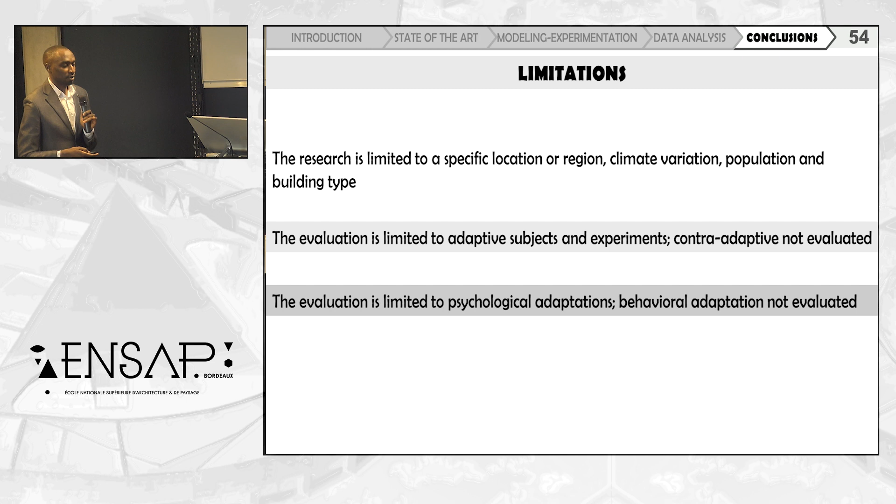The research was actually limited to a particular location, which is Bordeaux here. Also, it was limited to the climate variation in Bordeaux. The population type was also limited, and the building type was specific in this experiment which we conducted. Secondly, the evaluation was also limited to the adaptive subjects. Of course, we wanted to evaluate adaptation, but the contra-adaptive subjects weren't considered in this evaluation. The evaluation was also limited to psychological adaptations of the subjects, of which the behavioral adaptations were not conducted.

To go further, we also have a few perspectives, things that could be done in the future with respect to this work. One is we can do the same methodology in various geographical locations that have different thermal conditions or different seasons. We can do it with different kinds of populations, such as the old and the younger populations separately, the male or the female separately. We can also do it with different building types. In this case, we considered more of the office environment. We can consider the residential, and other large building types. We can also consider factors related to ventilation, to the olfactory, because some of these factors might not be thermal, but they also affect the comfort of an occupant, or the acoustics and the lighting.

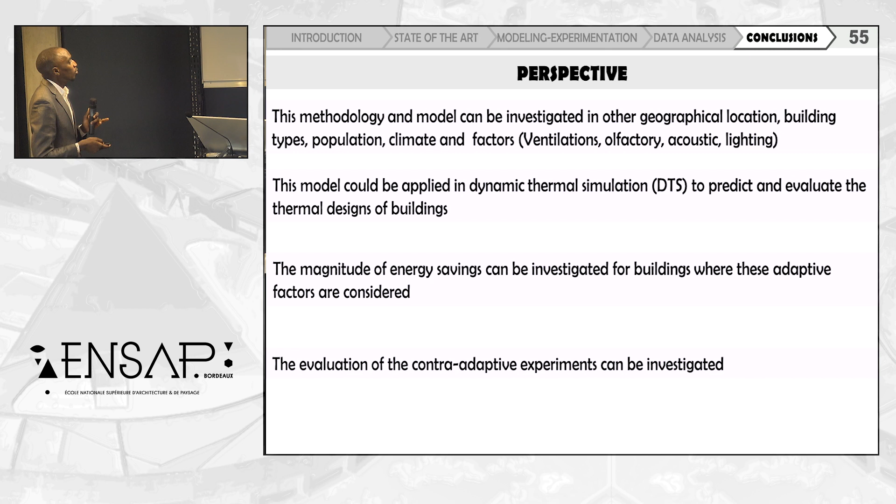In the future, we feel that if this model is tried in various places and has very good results, we can model it into dynamic thermal simulations, which are used for the thermal designs of buildings. Our reasoning is that with this, you can actually project heat energy into buildings based on the actual perceptions of the subjects. Also, if thermal designs are done based on this, we project a lot of energy savings, such that we can investigate the magnitude of energy being lost or saved by this method and thermal designs. And finally, we can also investigate the contra-adaptive experiment.